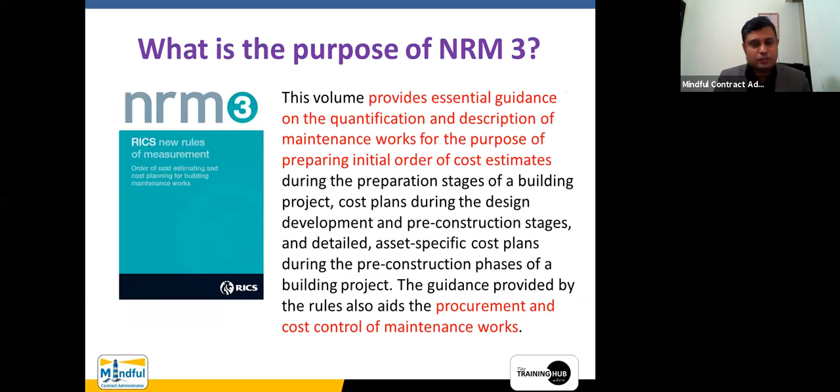I hope you remember I was discussing regarding the risks, and I gave you some insight about these 9 elements at the beginning of this session. And I gave you a little bit of a challenge to provide some responses pertaining to what exactly are the real risks within these 9 items.

So I got a couple of responses from some of the attendees and viewers, and I'm going to give you insight about how we are going to approach this problem. At a glance, you can see these 9 elements: time overrun, inadequate site investigation, environmental impact, ineffective quality management, cost overrun, poor health, employer's choice of materials, fatality, and unavailability of funds. These 9 items seem to be risks.

But when we move on to more detail, you can understand that I have color coded these 9 risk elements into different colors, and I'll tell you the reason why.

Now, you can see this inadequate site investigation has got two colors, right? I'll tell you the reason for that. This color coding, I hope you remember, during the first session I mentioned to you about four types of risks. The first one is design development risk, the second is construction risk, the third is employer's change risk, and there's another element called employer's other risks. We're going to identify the difference between employer's risks and employer's other risks. So this color coding helps you comprehend what cluster of risks each item belongs to.

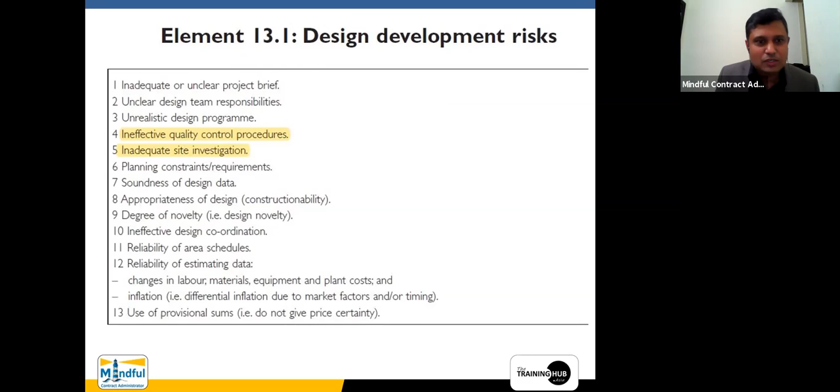That is why I colored this particular item B in two different colors. Inadequate site investigation falls into two different categories of risk - one is the design development risk, the other is the construction risk. And then we will move on to the other elements.

Now, we've already seen item B, C, and D definitely fall into the real risks. Then I'm going to item F, poor health and safety procedures. If there are no proper health and safety practices within construction, you can see this is a very long list which appears within the construction risks - 38 items have been listed within NRM1. The important thing is NRM1 itself says this is a non-exhaustive list.

I hope you remember, if you've gone through my YouTube channel, I mentioned the definition of the word 'site.' In the 1977 version, the definition had certain items: in, on, under, and through. Only these four items defined exactly what a site meant. However, FIDIC later identified that this is a non-exhaustive list, so they used the word 'at' instead, which may create ambiguities. They used a more wholesome word, called 'at the site.'

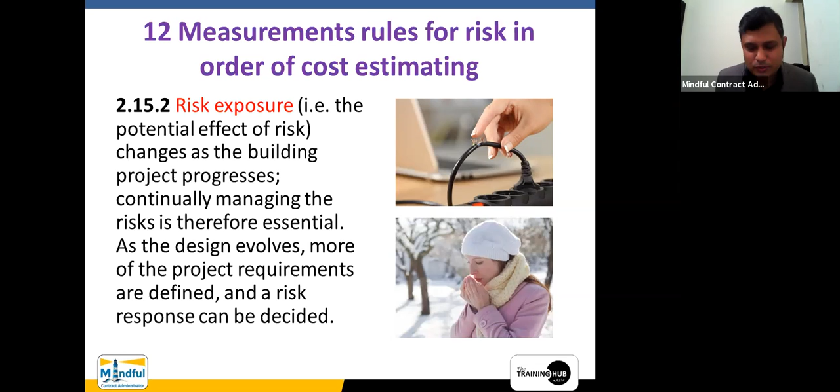Now, where the word risk response comes into play, once again you will come into this particular wording, which is called arts retention. Then item number three says limited information X%, full information 0%.

I'll give you a very tangible answer to this. You know about construction contingency, right? When you are putting a contingency, if you go to the risk definition itself, it is something related to a contingency plan. It is sort of an uncertainty. When you put a construction contingency at the beginning of the project, when you are signing the project, it may be 5% or 10%.

But once you come into the as-built situation, this particular percentage diminishes. Then once you receive the full information, it becomes zero. This is the same thing that applies to the design details as well.

But still, when you are doing the design, and once the design is finished, the risk will not be zero, because you are still not aware whether this particular design is practical, whether this design is constructible. That is why it will not become zero even once the design period is over.

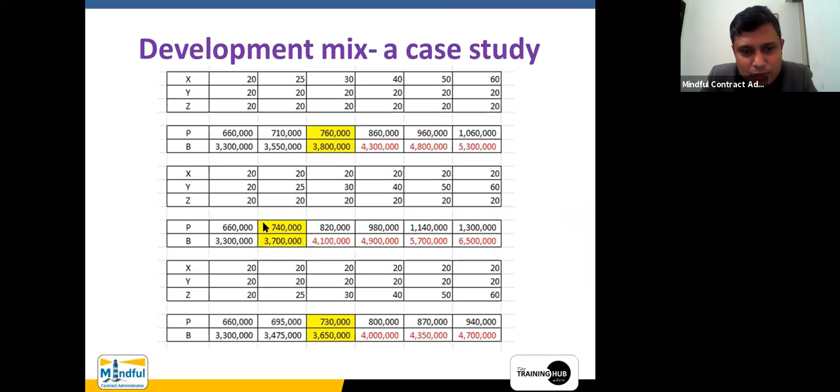They use something called EIFS. There are about 10 to 12 codes, but it is an integrated system which supplants the plaster and paint requirement. It is more thermally viable, more desirable, more durable. There are a lot of advantages of the EIFS system. So perhaps these different materials or engineering services become a salient point in deciding which is more suitable from a long-term perspective, from a life cycle costing perspective. This is how risk reduction can be done.

But there may be other things that come into play. For example, with EIFS, there may be people who don't have the know-how or the practical knowledge about how to apply this, so you may have to train the people. You have to think about the flip side of the coin as well, whether it is workable, whether it is practicable. In a context like Oman, you may have to be very careful, because people may not have the know-how for certain areas. In Sri Lanka and India too, this may apply depending on whether the technology has grown to the required desired level.

Then change in the project execution plan — another very important risk reduction method we can use: packaging the work content differently, or carrying out enabling works. You might have seen this in Oman, as an example for my Oman viewers. Project execution plans have been changed in different projects — for instance, the Oman Museum Across Ages, one of the projects being done in Nizwa area in Oman.

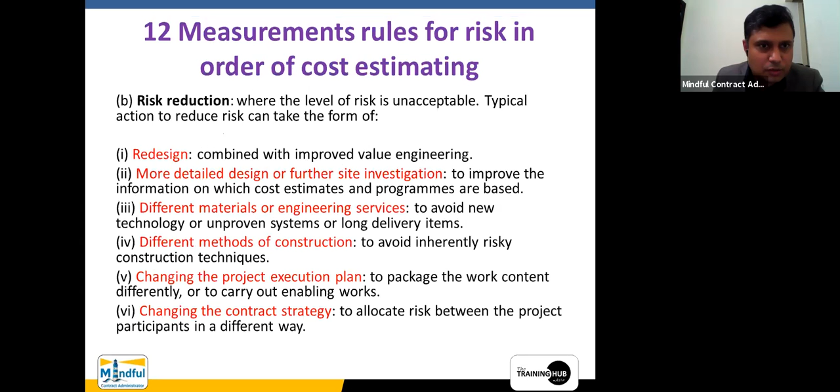And then risk retention: risk is retained by the employer that is not necessarily controllable. This remaining risk is called the residual risk exposure, which we are going to discuss separately. It's a bit of an advanced subject, so I will let you know about that in my third session. So this is how risk transferring happens.

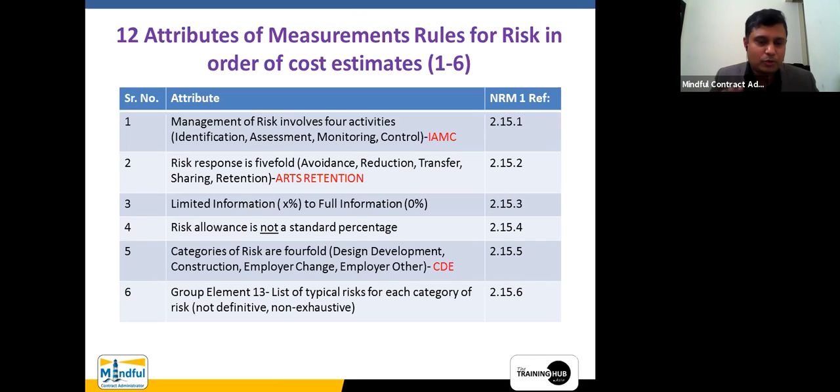Now we have come to a point wherein 4 of the 12 attributes have been discussed. Before moving further into these attributes, I am going to introduce you to something new, because there are certain overlapping areas which will not be useful. We are going to use this time more productively, because this is a 6-hour course. If I were to discuss all 12 things in particular detail, I don't think I will be able to cover everything, but I am going to cover the same attributes and aspects within the next item.

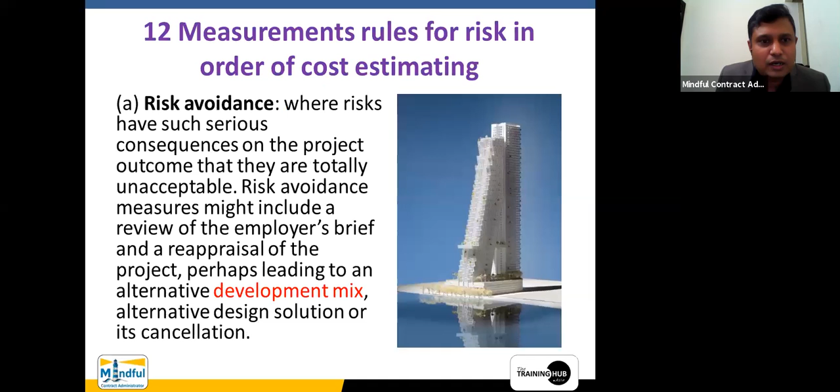Now the order of cost estimating has been covered substantially, and we are moving on to the actual cost planning. Cost planning is also of much importance, because it is defined by 10 attributes as opposed to the 12 attributes within the order of cost estimating. Now we are going to discuss those attributes.

You can see the first attribute: risk allowances are being allocated to reflect the employer's risk exposure. Even though we are talking about design development risks, construction risks, or employer's risks, ultimately the employer is the person who is going to pay for this, and who is going to enjoy the facility of the completed work. So ultimately, the employer's risk exposure is of prime concern in order for you to decide.

Number one is the consequences of employer's residual risk. No standard percentages - it is very clearly mentioned within the cost planning stage of the NRM1 that there are no standard percentages. Actually, the percentages have to be derived based on certain things, something like past experience. That is number one.

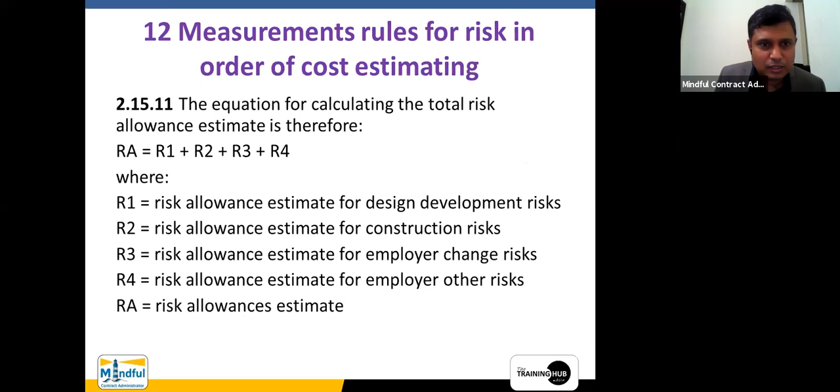Now here I'm going to take another comma and go up a little bit, in order to give you a little bit of understanding about ISO 31000, because this is going to be very important to you.

I have distributed this document to you as a pre-read material. ISO 2009, when it was issued previously, had a different approach. I will send you the 2009 version as well, which is also freely downloadable. It talks about three things: principles, framework, and process. Why I'm going to discuss this here is that it's talking about an organizational risk management platform.

From an organizational risk management platform point of view, once you look into the cost planning, there are a lot of things you can learn, a lot of things you can value-add into your cost planning process.

Now it has got seven attributes. If you go to the foreword, the first portion of this particular ISO standard, it talks about seven things. I'm going to discuss those seven things, which is very useful for you. This is a very small document, better to have a printout and keep it with you. It gives you a different opinion, a different angle of how you look into risk. Number one, it says: managing risks, making decisions, setting and achieving objectives, and improving performance.

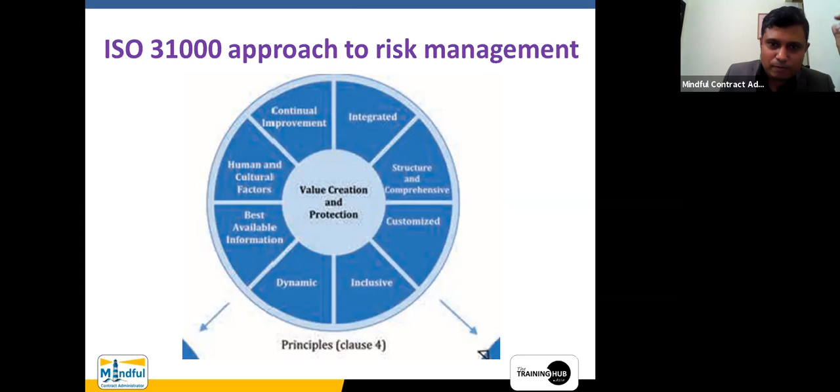You have to customize it to benefit your situation in order to cater that situation into your project. This is one of the important things. Then structure and comprehensive, then integrated. Regarding the leadership and commitment also, this is something the framework says, right?

And here the risk assessment, they have used three different things. First one is risk identification. Actually, when you are talking about the cost planning process, it is also there. Risk analysis - this is what we are doing as the quantitative and qualitative risk analysis. And then the risk evaluation, then we are doing a sort of a Primavera run or Monte Carlo simulation. It's the same thing, it's not a big thing, but it's something very similar to our process, right?

And then why I wanted to mention about this particular ISO 31000 is this is of utmost importance in order for you to comprehend this cost planning process, right? The 10 attributes to the cost planning process, right?

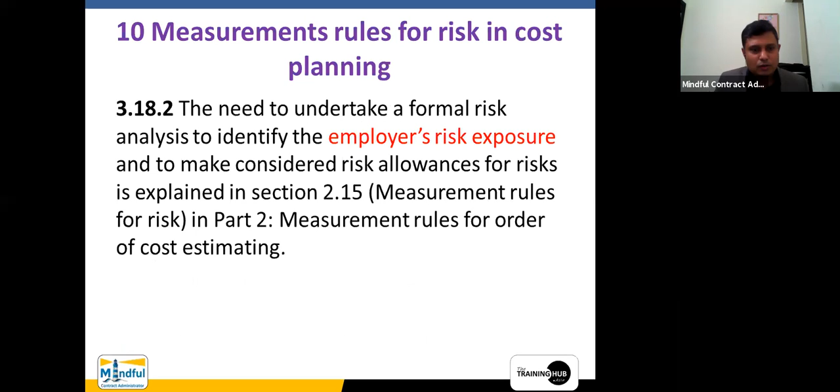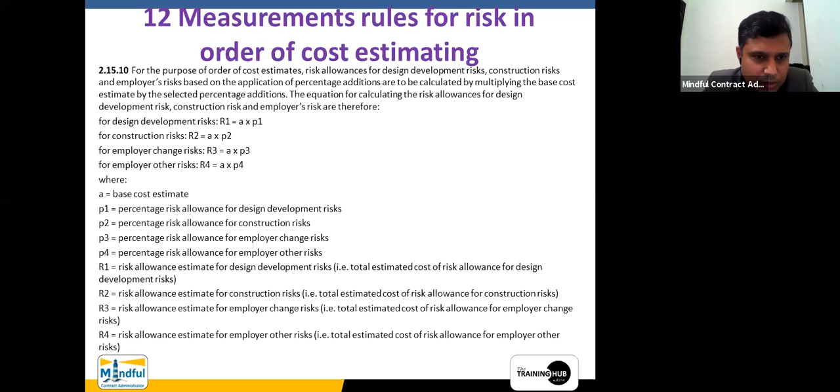Okay, now we were talking up to item number three, the reassessment of risk registers and risk estimates. We are going to talk about a sample risk register in the next session, how these risks that you have identified. Now if you go to this one, let me explain this to you. It's very important for you to understand this as well. I have spoken to you about a couple of risks, which I extracted when discussing the exercise I gave you.

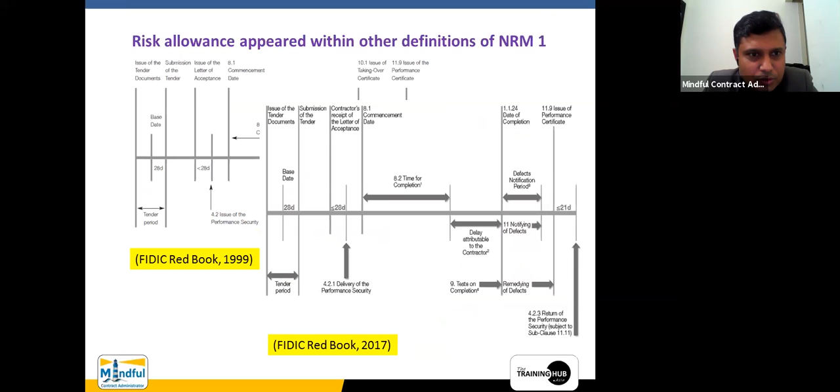Also, the engineer needs to go through that. And this is very commonly happening - inadequate or unclear project brief. This happens owing to the fact that most employers do not have specialists in their project management team. I'll give you a simple example: the Sydney Opera House - when they were constructing it, they said 'we want to have an opera house.' Now see how big that is, how ambiguous that is, how clouded that is. When you talk about an opera house, my Oman viewers know about the Royal Opera House in Oman - you know how sophisticated even the seating arrangement is, how sophisticated even the lighting arrangement is. If you go through that, you will understand a lot of things. So we cannot just confine the project brief to a single sentence.

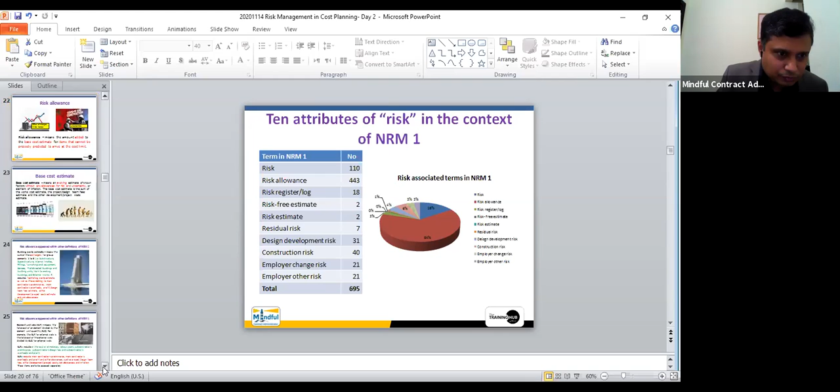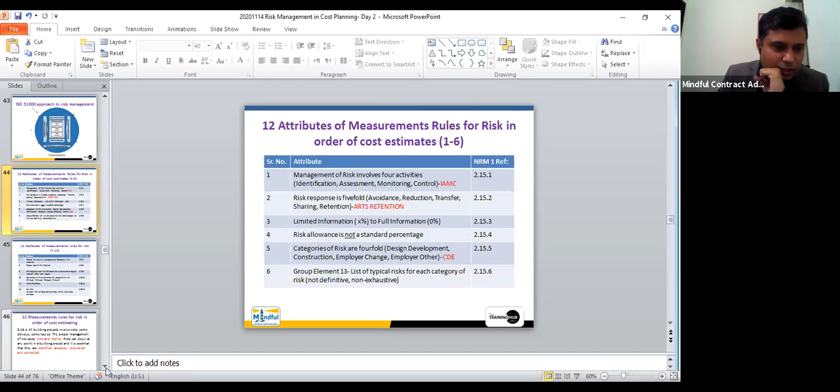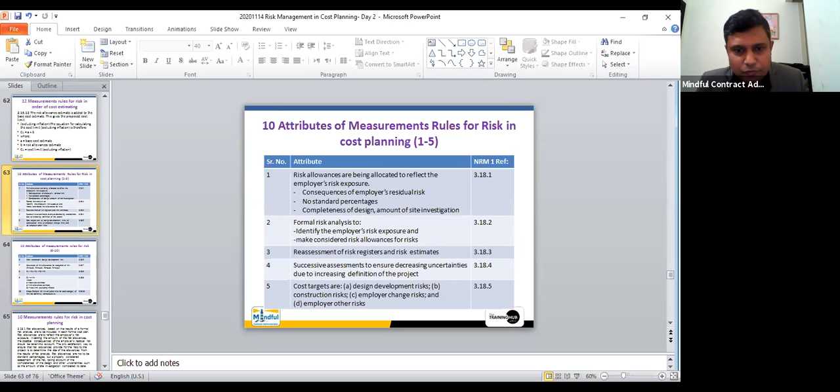Now we are at the 10 attributes related to cost planning - the reassessment of risk registers and risk estimates. I'm going to do a couple of examples during the next two sessions related to that. Then successive assessment to ensure decreasing uncertainties - I discussed about that. Then the cost targets.

This particular model is familiar to you. When you're talking about elemental cost planning, your cost targets are - let's say within the substructure you're talking about demolition, excavation - you have some more sub-elements. Here the cost targets are design development risks, employer change risks, construction risks, and employer other risks. The importance is that all of these lumped together give you a value, a percentage. Then you have to manage this percentage so that you are not exceeding the cost limit.

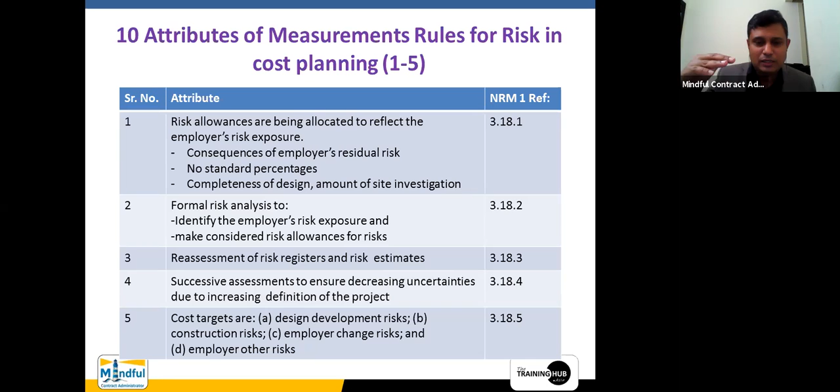Now it comes to the next one: calculation of risk allowance for categories of risk comes into play like this. This R1 is what you call the risk allowance estimate. It comprises two different elements: number A is the base cost estimate. You know the base cost estimate - it is the risk-free estimate, the estimate we arrive at using up to elemental cost plan item number 12.

So all these are the multiplication of A, that is the base cost estimate. When one of these risks comes down, you may have to use that particular saving you are enjoying for another area, maybe another area has got a higher risk percentage. So this is how you do that compromising technique, how you give and take, because at the end of the day you cannot exceed the cost limit.

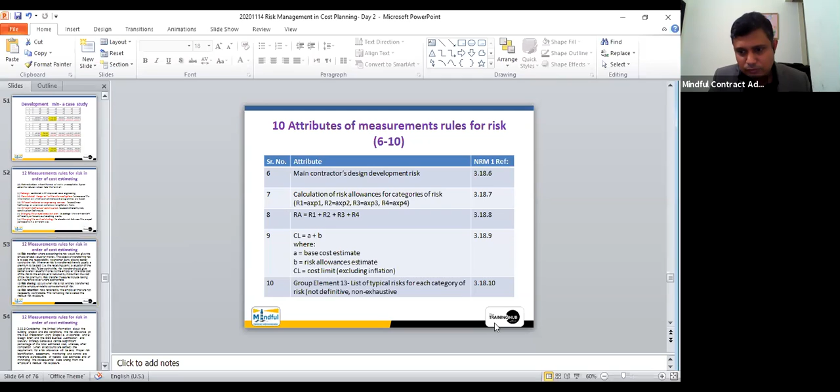See, cost limit including inflation comes into play once you do the inflation estimate. So therefore, there is a construction inflation estimate. Normally we are talking about two cost limits: cost limit excluding inflation and cost limit including inflation. So those are the two different things that we are talking about, right?

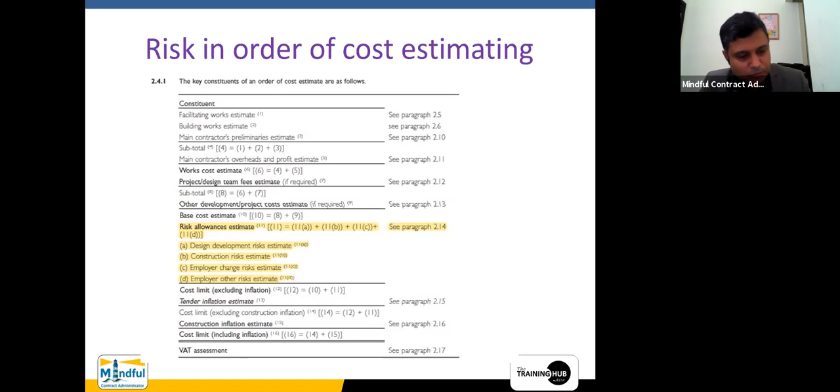Another important thing which I wanted to discuss last time, there's a small minor correction which I have done in my presentation. Once I share that with you, you will understand what it is. It is about this one, building works estimate, right here.

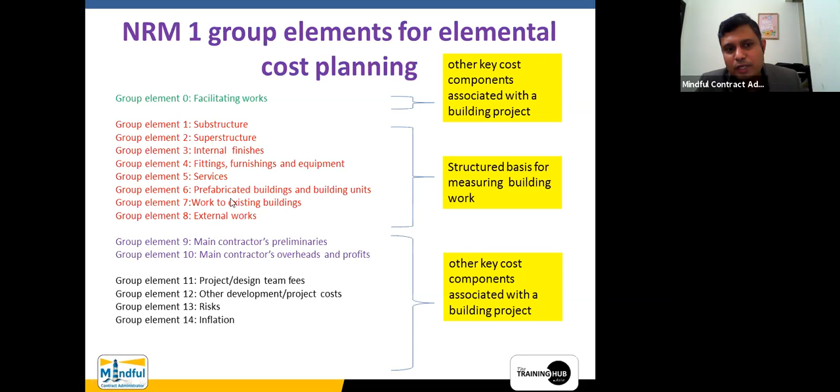Okay, now previously, when I classified this, you might have seen that item 8, external works, I have separately used there. But in the correct manner, the structured basis for measuring building works is actually group element 1 to 8. Why I am saying that is because of this particular definition.

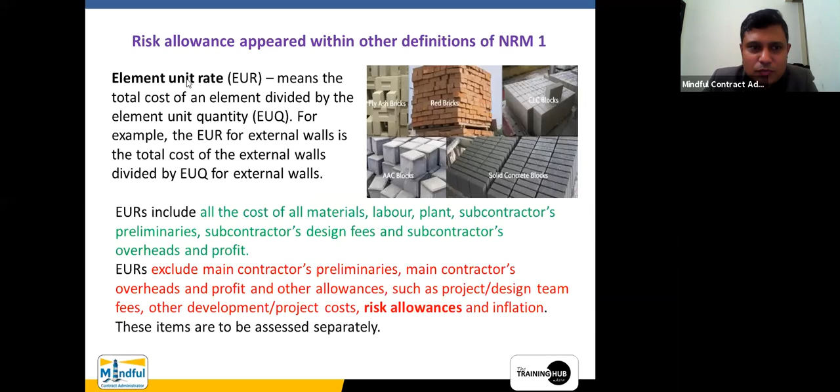There is a definition for base cost building works estimate. You can see building works estimate means the sum of cost targets for group elements 1 to 8. Now, when I am talking about the risk, the cost targets for risk is design development risk, construction risk, employer change risk, and employer's other risk, as opposed to the cost targets which are coming in the building works estimate: substructure, superstructure, internal finishes, fittings, like that.

Now what we are doing normally when we are talking about the building works estimate, let's say you have put a price for the unit rate. Let's say in order to build a four-star building, you are putting a price of, let's say, 450 riyals. For my viewers in Sri Lanka, it is 450 to 500, right? 478, but for the purpose of easiness of calculation, I'll say it's about 500, the conversion rate.

So what we normally do is, when we are giving cost targets, when you are talking about 450 per square meter for a particular hotel, what you normally do is subdivide that 450 into substructure, let's say 35, superstructure say 80, internal finishes 120, something like that. So when you feel that in the superstructure area you can save, rather than using a conventional method, you use a precast method, so all of a sudden the superstructure cost has drastically come down. So that saving you are making can be attributable to any additional costs in internal finishes.

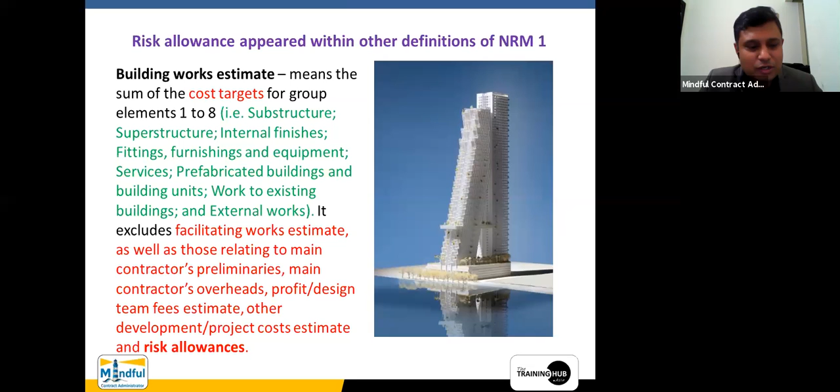Okay, maybe the hotel operator wants to have higher finishes than specified. So this is how you do the complementary technique in order to have the same cost limit. Likewise, in the risk planning stage also, we use the same technique. When you have more risks related to construction, you allocate more percentage to that one and reduce the percentage from the design development, like that. Maybe the employer's risk, right?

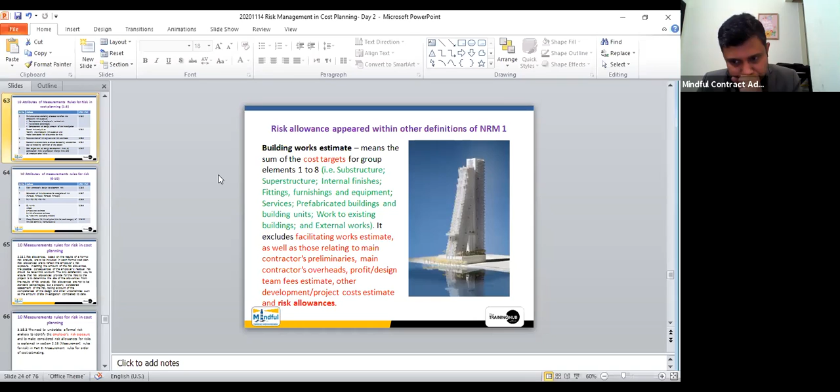Now we are talking about the cost targets, and these five are correct. Then you are talking about the same group element. Why I did not discuss about those 12 elements in the elemental order of cost estimating is because this particular group element 13 related attribute is already there within that order of cost estimating, even this base cost estimate. So it is the same thing which is repeating here.

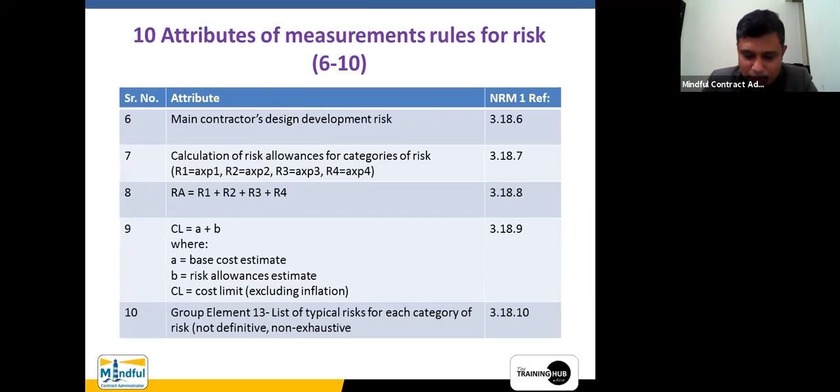But there are some important things you need to understand, which I will explain to you, called RIBA work stages and OGC gateways. This is not a new thing to you, but I will discuss them in detail in the next session.

It is clearly mentioned that risk registers and risk estimates are to be reassessed at regular intervals throughout the various RIBA work stages. You need to know RIBA work stages and OGC gateways. We'll be discussing those in full detail in the next session.

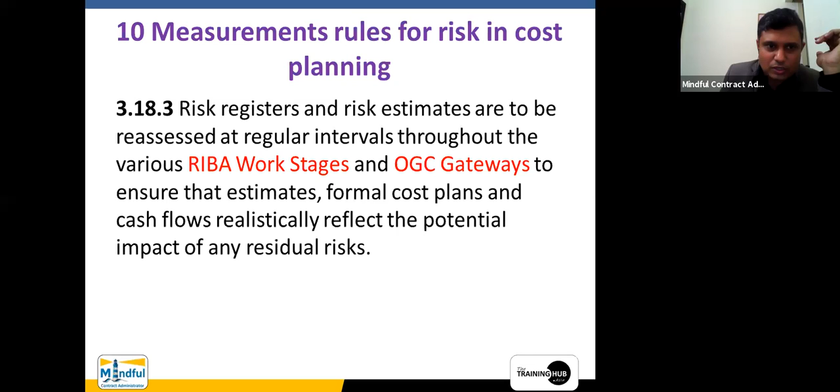Something very important which I wanted to discuss once again is this design development risk. When talking about design development risk, rule number 6 of the 10 measurement rules in the risk for cost planning says main contractor's design development risk. What do you mean by that?

You are aware that in the FIDIC Red Book, I hope most of you are FIDIC users - I have viewers from UAE as well, so they are much familiar with FIDIC 99. If you are using the FIDIC Red Book, apart from small elements, the major design liability lies with the engineer, isn't it?

So what it says is, where design liability is to be transferred to the main contractor, now it is called the risk transfer. This I already explained to you.

So where a design and build or other main contractor led design contract strategy is to be used - what I'm talking about is a procurement strategy change, like changing into an EPC contract or something similar - it is recommended that an allowance for main contractor's design development risk be included in the risk allowance.

So the situation is quite different when you are assessing something like the FIDIC Yellow Book. That is why, depending on the procurement strategy and the book you are using, if you are changing from the Red Book to the Yellow Book, you can see that some changes need to happen.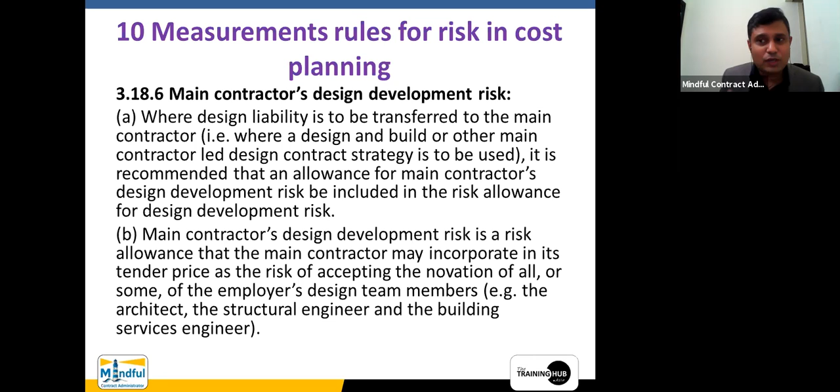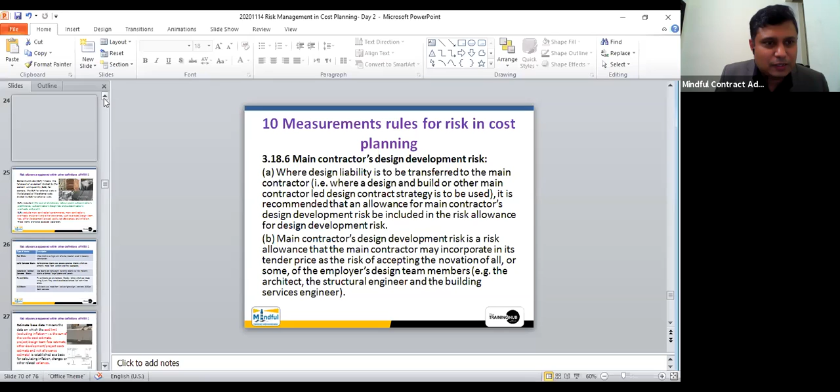We are talking about the construction risks. Now let us go into these particular construction risks that we were talking about the other day, today itself, because the contractor himself, when pricing his document, is using a particular risk.

Mostly the contractor fights that that particular risk element does not belong to the employer. So in most standard forms of contract, it does not talk about that. The contractor's fight is sometimes justifiable because the risk element belongs to him if he can prove it properly within the rate breakdown.

When talking about construction risks, if you go back to the first rule of the risk allowances, it's talking about the risks faced by the employer, not the contractor. The employer is the person who may be suffering from schedule overrun as well as cost overrun - those are the two different attributes.

But let us go through these construction risks. It says inadequate site investigation - this is applicable to the contractor as well. But when you are pricing that one, we are talking about the cost incurred by the employer, not the cost incurred by the contractor.

This you need to understand when moving on to NRM2. When doing the cost estimating for the pre-tender price, you consider how to put yourself into his shoes - we call it the devil's advocate scenario. You look from the contractor's eyes. This is how a pre-tender estimate has to be done - how would a contractor think? This is how.

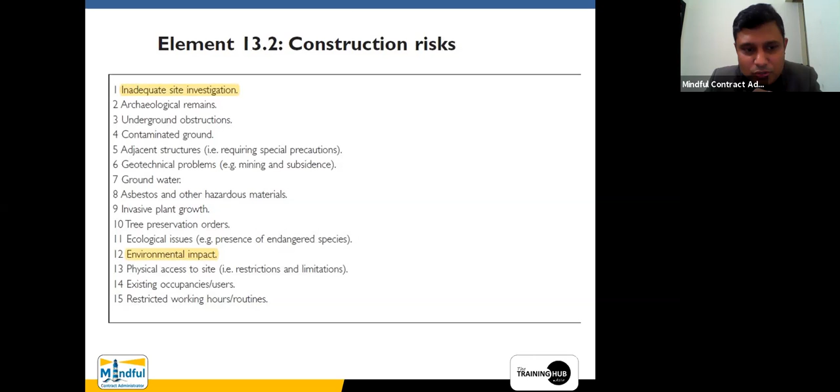Anyway, so this is how those things are. And then invasive plant growth, tree preservation orders, ecological issues, environmental impact - all these things are construction risks that the cost planner has to take into account. So it's very difficult how we do the pricing. We will discuss about it within the next session as well. So those are the things that come into play.

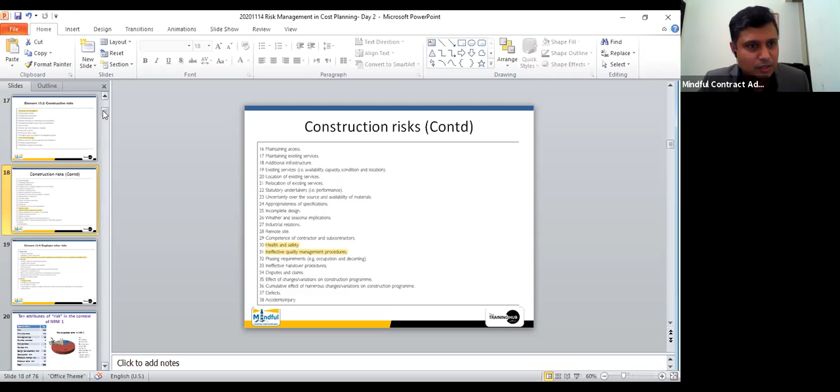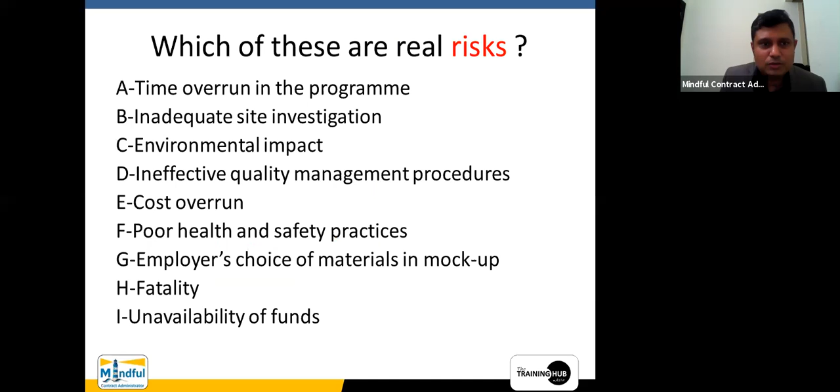Now I'm moving on to this question which I asked in the beginning. I'll give you a little bit of a clue, because it will be useful for you for the next session. Now, if you go to the risk definition, it says a risk can be defined as an uncertain event or circumstance that, if it occurs, will affect the outcome of a project. Now here we are talking about time overrun in a program, cost overrun in a program, and fatality. Now think about what needs to be stopped or eliminated if this is a risk. I'll give you a little bit of a clue - that is why I wanted to highlight that.

What sort of action would we have taken in order to avoid a fatality? Where does the real risk lie? Think about it. During the next session, I will reveal the real answer. You still have time tonight to go through this and think about why items A, E, and H are either real risks or not.

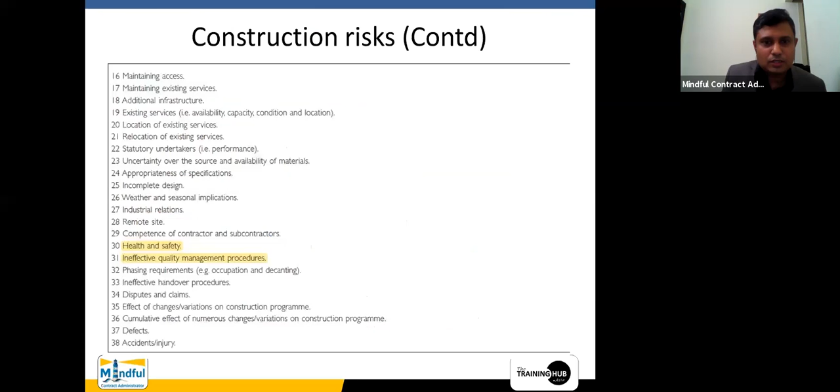Sorry about that, one minute. You can see the word 'risk allowances' appears 443 places, but out of this, the word risk mostly appears within the elemental cost planning section. Even 'risk allowances' mostly appears in that particular area. So that's what we're going to discuss in detail.

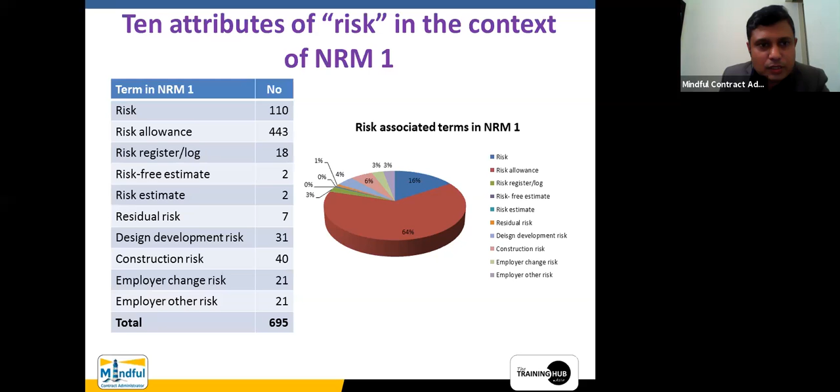Coming back to the day three session: we are going to talk about International Construction Measurement Standards, ICMS. I've already sent it to you, how the risk aspect pertaining to ICMS tallies with NRM1. We'll discuss this because ICMS is meant to bring consistency to global cost standards. It's a universal thing, which RICS, the Royal Institution of Chartered Surveyors, is also part of. This risk approach in ICMS and NRM1 will be profoundly discussed. So this is how we are going to structure the third session.